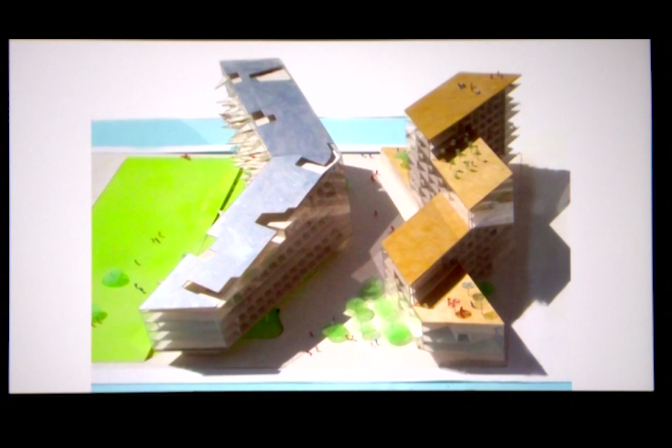This is our office in Copenhagen, an old brewery factory. Then of course we have New York, and we opened an office in London last year. We're now numbering about 460 architects between the three offices. I'd like to start with some older work, about 15 years old, to ground you in both where we come from and the kind of thinking that went into these projects.

Also note that in the first 15 years of BIG and Plot, the office prior to BIG that Bjarke and Julien had founded, there was really only one project a year completed. In the past 6 months, we've actually completed 6 projects. So the volume of work produced over those first 15, 16 years was not a lot. It was really just getting started.

I think our profession just takes so long to get things built, permitted, and financed. So there are many projects we've been working on for 5, 6, 10 years that are just starting to finish. This was a housing project called the VM Houses, completed in 2004, and it was very important to the office. It was the first real architectural project. Prior to this, there had been a bathing platform, the Copenhagen Harbor Baths, and a youth center, the Maritime Youth House. So this is 250 apartments, not a small project.

The city in Denmark has a master plan, and you're supposed to follow it. The master plan had asked for the yellow area to be a parking garage and the blue area to be a housing project. We thought, this isn't very nice — the first three to four floors would look directly into a parking garage. That's not somewhere you'd want to live.

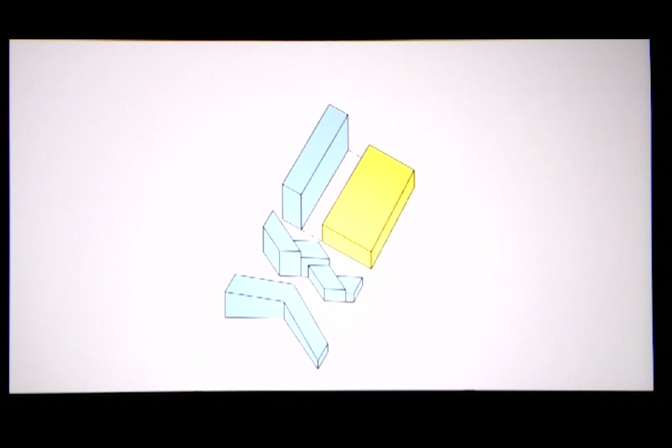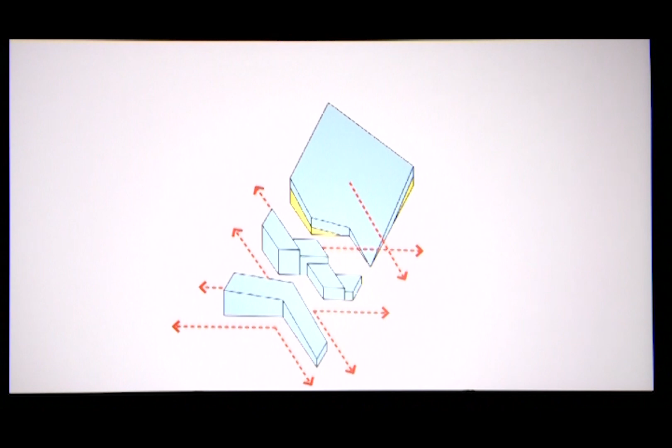So we went back to the city and asked: what if you use the parking as a base, and place the housing on top? What if you cut away exactly those views we were so insistent on in the first project? You're taking square footage away from the client in that case, but making an argument for the value it has for the adjacent projects — 80 units, all south-facing, creating a new hybrid type of building that includes 450 parking spaces.

It's called the Mountain. We decided to perforate the metal around the parking, because air has to move through a parking garage. And while we're at it, instead of perforating it with one diameter hole, we used six different diameter holes to perforate it with an image of Mount Everest. So you're in the flattest country in Europe, Denmark, but you're living on top of Mount Everest.

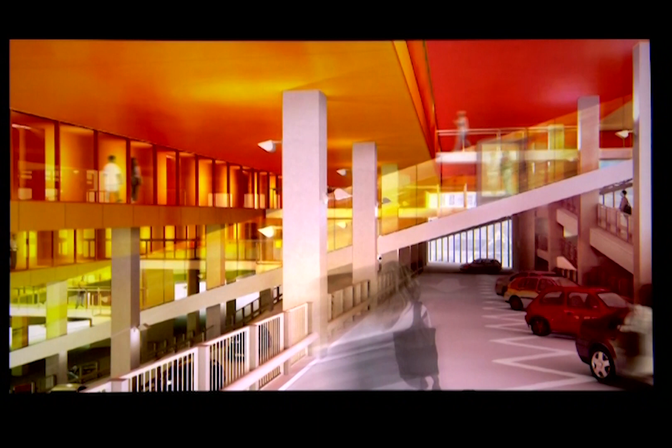The parking garage is seven levels that ramp up. We discovered that if you used traditional up-down elevators, you'd need seven of them to service 80 units — no one in their right mind would do that. So we had to come up with a new type of elevator: a funicular, a single elevator that moves up with the units, allowing you to service all 11 stories with just one elevator.

Yet there weren't any funicular elevator providers in Denmark, because it's flat. So we had to call up Switzerland and ask if they had a funicular for us. The guy said, 'Where are you calling from?' 'Denmark.' He said, 'I have to see this.' So he flew up, looked at our model and the project, and said, 'I love this project — we're going to do it, and I'll give you a good price.'

So we put in the first funicular in Denmark, and it's like a joyride — all the kids want to live there so they can take the funicular up to the units. Now the guy selling the funiculars has this project on the front page of his brochure, which says, 'We deliver funiculars everywhere in the world, including Denmark.' So sometimes you have to think outside of what you're used to or have access to in terms of materials and construction techniques, and maybe import them from other places.

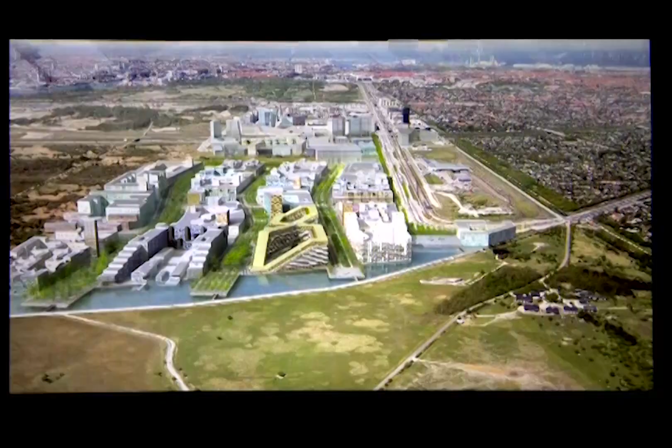I think that's a valid architectural prototype also for a place like Dallas, where you go from suburbia, and here you come into the city and it goes straight up in glass. Maybe there are actually some middle kind of projects that could bridge between the suburban projects and the high-rises and things you have downtown.

We did very well on the second project with the same client, so we got a third, which is the 8 House right here in the front. This is a new area in Copenhagen where 50,000 people will be living and 50,000 people will also be working in different parts. This is a direct reaction, or outcome, of the 60s and 70s suburbanization that was just eating up the land all over Denmark.

The construction technique in Denmark is that 90% of all construction is prefabricated concrete elements. All structure, all floors, many walls, fascia, facade material, roof, is all precast concrete, because the seasonality is so short to actually work outside on sites. So it's like Lego - you order different pieces, they get delivered to the site, and then the cranes just pop them into place.

It allows for a new way of thinking about a project. A project like the 8 House, which has no parking and 500 units - we touch the ground with ramps in 3 places, and then the units actually move up so that you can ride your bicycle up to the 10th level apartment just with the ramps. Every unit is actually going up about 18 inches from the next one.

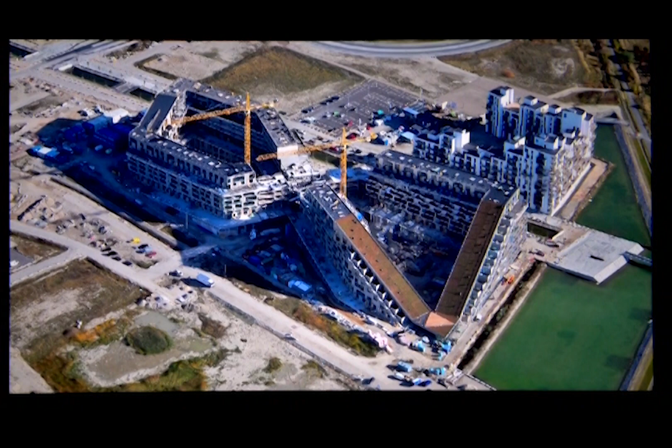It's pretty remarkable, but this was only possible because it was done in a factory. If it was a site-cast building, this would be impossible - the amount of work and all the form work. Because all the pieces were pre-ordered and put into place like Lincoln Logs, it actually became possible to do a building this complex.

500 units, 125 unit types. There are probably realtors sitting out there going, oh my God - they actually have to work. My question to the realtor world is, why do residential towers only have 4 or 6 unit types? And then I love the names - the eclectic, the modernist, the classic - like they're shoehorning all of us, this beautiful, wonderful, multi-faceted crowd, into 6 unit types. Our feeling is that life is bountiful, and thus all unit types should be bountiful.

There are families with 1 mom and 3 kids. You need many bedrooms, you need fewer bedrooms, your family changes, and so you need to create that variety in the buildings. So in this case you have shops and commercial space, row houses, flats, and penthouses. We use different types of living and working to create this ability to move up and down.

This is the southernmost point of Copenhagen, meaning the city limits end at the building, and then it's a nature preserve. So this is also where you can send your kids out and they'll actually be able to play. The other thing I really appreciate about this whole new master plan is that all of the rainwater is actually not put into canalization or into pipes.

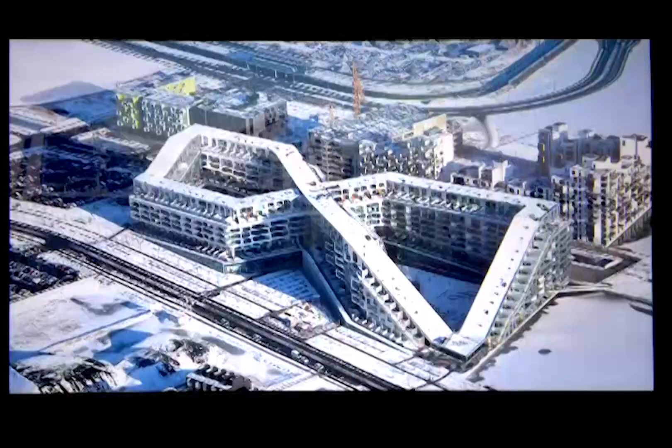So the 8 House, to me, and the whole area, is really a wonderful way of thinking about city building and making a life that we want to live in.

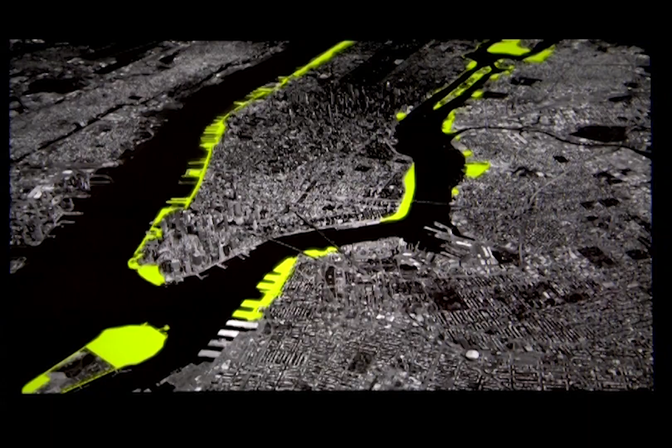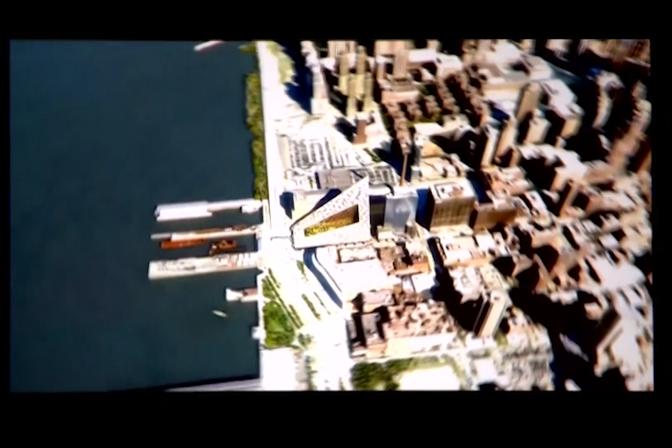So we got our first project in New York 6 years ago, called the West 57th, or VIA. It's 710 apartments, and it just finished 6 months ago. It's a direct result of this new investment along the waterfront. You see the park that just sort of skirts right by, and it's located between Hudson River and Central Park.

In many ways, the last 50 to 60 years in New York has been driven by a single typology, meaning skyscraper.

So truly, if you were building commercial space or residential somewhere in the city, you would probably put a tower on top of a podium. And the opposite is true in Copenhagen, where we're from. 90%, 95% of all buildings there are courtyards. They don't build high-rises there. It's the exception. So we were kind of fascinated, here we are, brand new, coming from Europe.

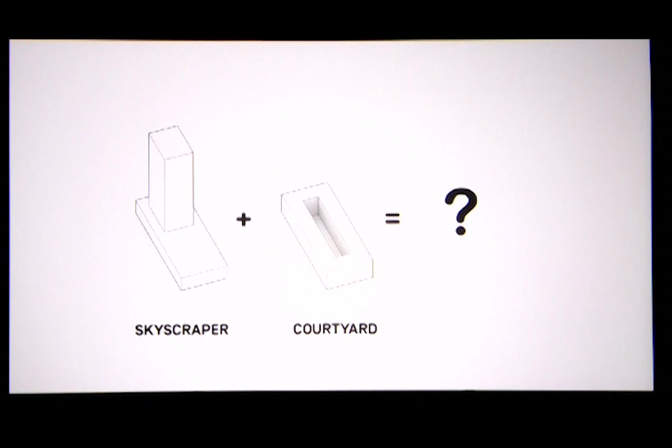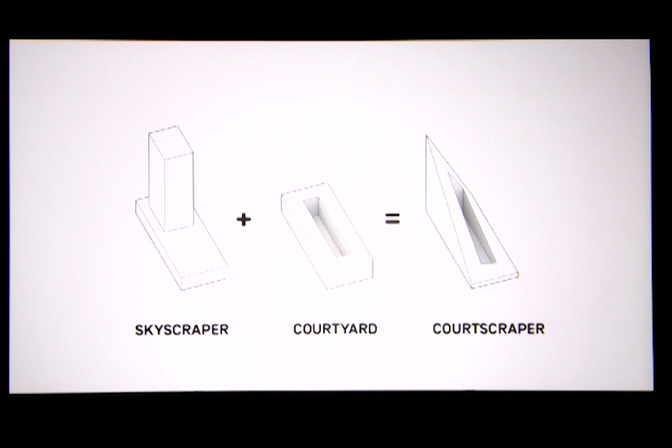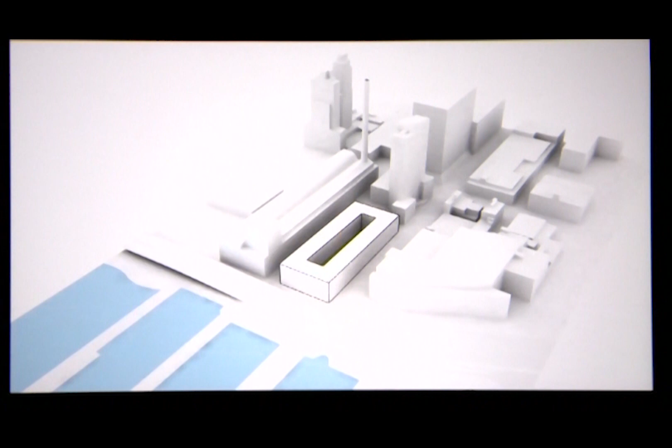What would happen if you married a skyscraper with a courtyard, and the result would be a court scraper, of course. And the court scraper was born because if you look at this site closely, the site actually is between a 1930s power plant on the left and a trash distribution center on the right. So we wanted to create the courtyard to be able to look inward.

But instead of the courtyard being on the ground level like in Europe, we raised the courtyard to the second level. Then we still had the podium that's so important in New York. We raised the northeast corner 44 floors, and we preserved the views of the building behind, so we're a good neighbor.

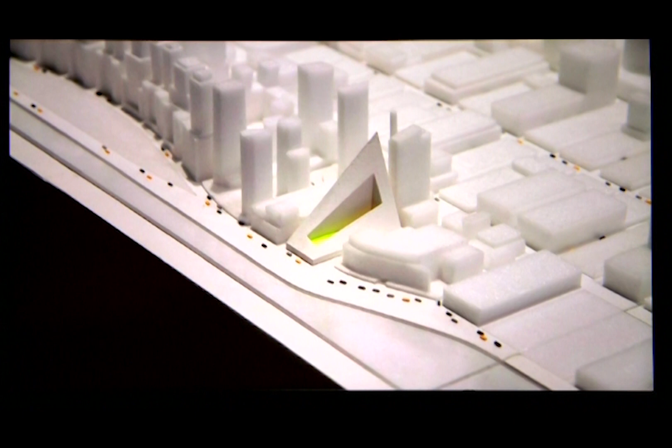The sun still is able to come into the courtyard, and thus we kind of create this new typology. The building is entirely driven and designed by all of the constraints and the challenges of that site. The city planner had nixed 2 previous designs by different architects for that site, and stated with this project that it was, in her mind, really the right thing to do on the waterfront.

Instead of building yet another tower, those towers that are lining up against the edge, that takes the views away from everything within the city, we basically allow the site to grow from the water's edge towards the back of the site.

And so this was really a chance to, after 6 years of having an office in New York, to finally have a project that was built. It was really, really satisfying.

And what Central Park is to the city in terms of its urban space, the courtyard is to this building. The courtyard is exactly 13,000 times smaller than Central Park. It also still has many of the same programmatic elements. There's a meadow, there are places to grill and hang out, there's water features for the kids to play in. So we really learned from Central Park about what it is that people really, really love.

And so when you actually move through the park, there's a lot of different vegetation, there's shortcuts, you can take the meandering path. This is a rental building. That's important to state. It's also 80-20, so 80% of the building are market rate and 20% are affordable.

And in New York, that means that a 1-bedroom is around $600 a month for the affordable units, 142 units, and that the same unit is $3,600 for the market rate. And because that's a very high price, there also are a lot of amenities that you receive when living there. There's a pool, and then you have a half-court basketball court all tucked in within the building, a poker room, and then, of course, the units themselves that look out to the central courtyard, as many do.

And so it's really a different kind of species of building that, for me, one of the funniest things was because this looked so different, for many years, no one believed, either within the real estate market or even engineers, were coming and saying, ooh, that's a really difficult building. And you're like, excuse me?

When you build a glass skyscraper, a tower, the biggest force against it is wind. And anyone who has ever had a domino in their hand and blows on it knows that dominoes fall down because of wind. The beauty of this building is actually that you have the fattest foot at the base, and you have the smallest amount of resistance at the head or at the top.

So you actually use less reinforced steel. You actually can use a thinner core wall. You actually are able to gain square footage as you move up in the building. So there are many things that I think, just because we have kind of made ourselves think that this is the only way to build, and we have created systems and construction techniques, it's very hard for people to get out of that thinking of a traditional skyscraper.

But there are other ways of designing that have other benefits. So what we're hoping to do with a building like this is to show the beauty of having daylight into all rooms.

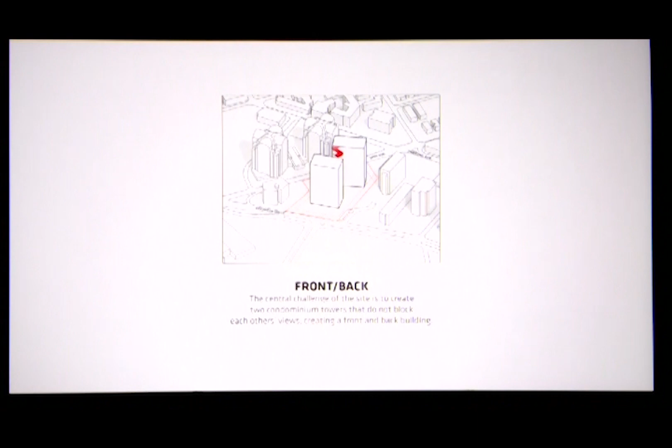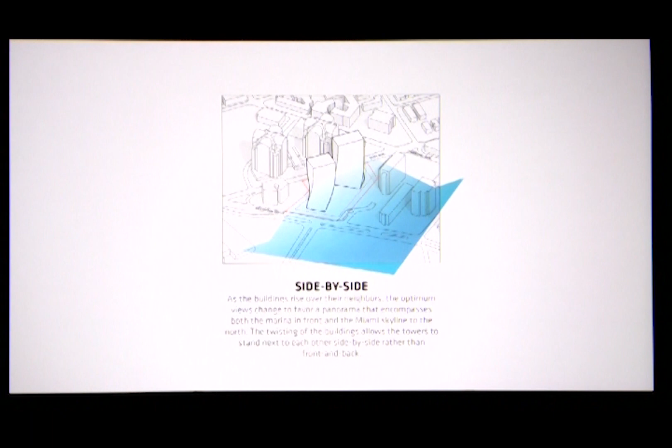So we decided to play around with that idea, and instead we decided to twist the buildings so that they appeared more side by side. Thus we were able to capture the same value in the back building as the front.

We decided we could get away with this by combining everything with a very lush landscape so that it was perceived as one project, not 2 towers. There's also one entrance, one porte cochere that you get out and enter into the 2 buildings. This perception of one entry, one landscape, and the same views allowed the client, Terra Group, to actually sell the back tower at the same prices.

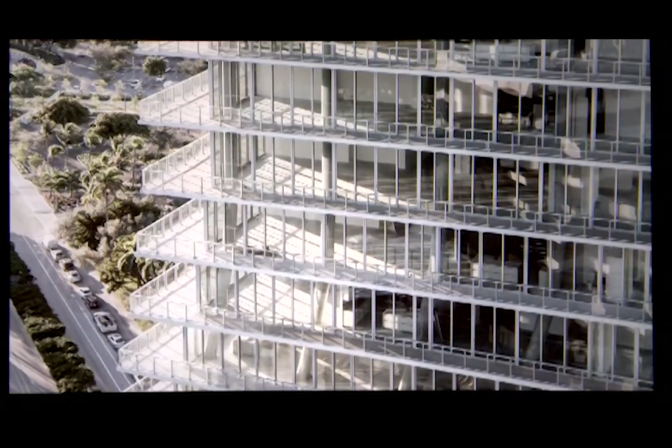We have a lot of generous amenity spaces. The inside and outside really flow from one into the other, and we have very generous floor-to-floor heights. We have the largest sliding glass doors that are hurricane-proof, and then, of course, the pool on the roof, which is a must in Miami.

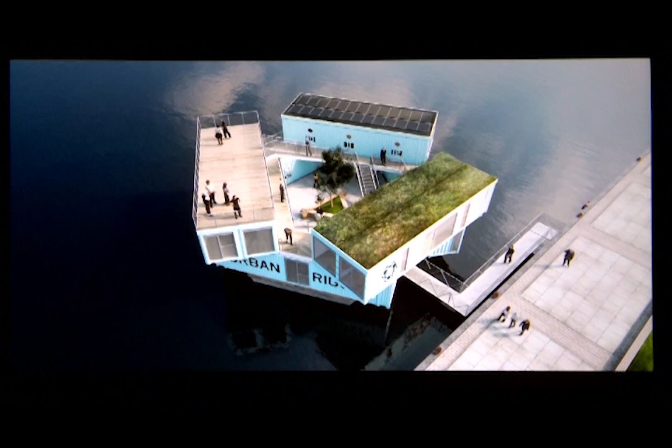So those are the kind of projects that show how we're working at a very luxury, high end of residential project. Now I want to talk about a project that we got, and I'm sure many of you can really identify with this client.

He came about 2 years ago, and there is a shortage of student housing in Copenhagen. 40,000 students live at home with their parents because there aren't enough student houses, and the other units are just too expensive to rent. So this father came to us and said, 'Please help me get my son out of my house.'

And so that was the job. What he basically said is we have to find ways to reduce the cost of student housing. And this is nothing new.

The idea we had was to recycle shipping containers. Denmark is one of the biggest shipping nations in the world. These shipping containers have a life of about 10, 15 years, and then many of them get dumped out into the ocean, either to build coral reefs or just to get rid of them when they've gone past their life expectancy. So we decided to upcycle these shipping containers into homes.

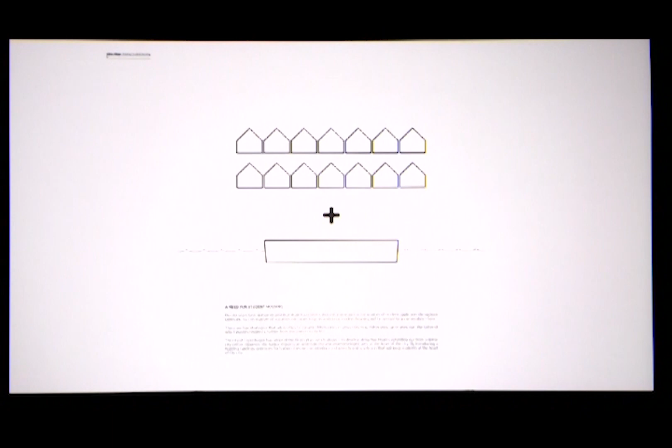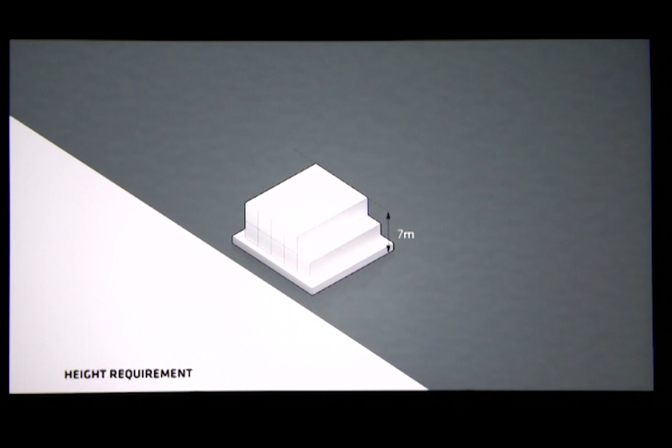The idea for us was not so much to think about the recycling of containers, because there are many projects that do that, but to actually think about the community you're about to create. So we were looking at how these different shipping containers could be positioned, placed, how they could scale, and how many floors you could stack on top.

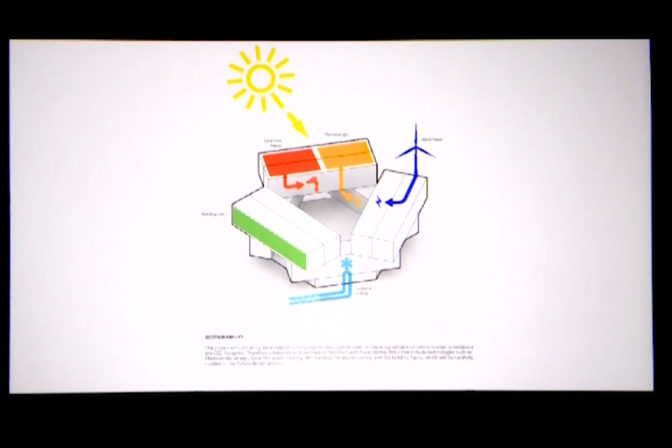We came up with this prototype of 12 beds, or 12 units. It basically has PV, or photovoltaics, to heat all the water. We deal with waste on the boat. We try to tap into different renewable energies, so it really is almost self-sustaining.

The beauty of these floating homes is that, in many European cities, you have old coastal towns that used to be industrial. They used to have shipbuilding or some industry, but that industry has left, and now they're just gray zones, brownfields you don't build on. It's interesting because those are generally in the most central parts of the city. They have all the utilities that go out to them, but no one is allowed to build on the land.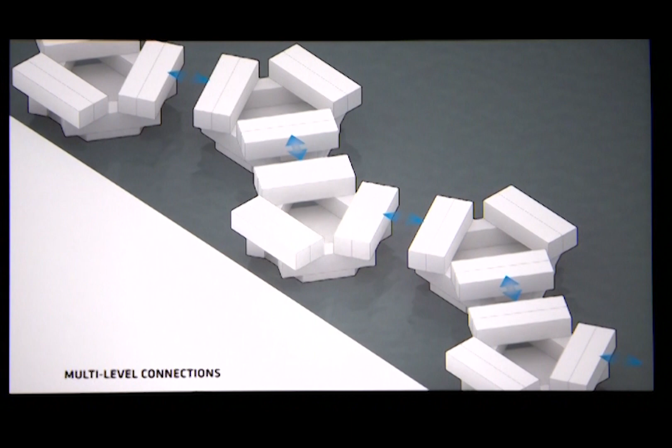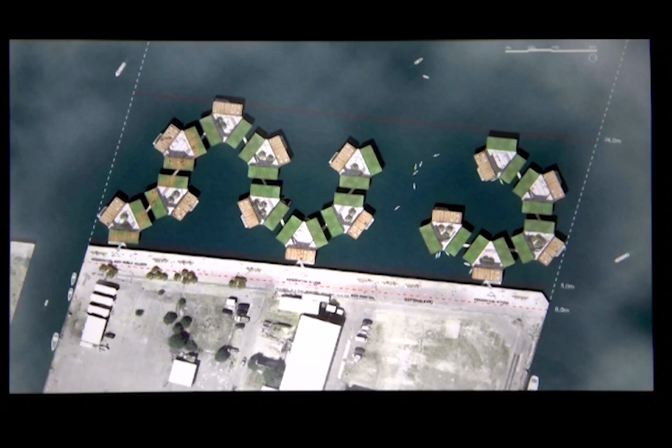So we decided, what if you created the ability to build floating villages that tap into the existing utility grid and create student villages. The other beauty is that your bedroom, in essence, has the same view as the 5-star hotel next door.

We built the prototype in Poland. It has a cement basement that actually goes under the water level, which creates the ballast. Then you take the shipping containers and arrange them. We tugged it from Poland to Copenhagen, and it's now lived in by students, including the son of the original dad—he's very proud of that. There's a little landscape element in the center, and imagine that this is your bedroom as you're going to college. Not bad, right?

We are now in discussions with two other cities, one in France and one in Sweden, to take this to a much higher and larger scalability.

The other thing that Europe has really dealt with over the last two years is the influx of war refugees, especially from Syria. Two to three million people that weren't there are there now, and the countries in Europe are breaking down, both in terms of infrastructure and where to house everyone. So these, we thought, yes, they were conceived as student homes, but they could also serve as temporary refugee homes.

These are built at one-fifth the cost of a traditional dorm room bed on college campuses, and they can be built within about one-third of the time—one-third of the time and one-fifth of the cost. So these things can be produced and done, and you're doing something good by upcycling waste that we're dumping into our oceans.

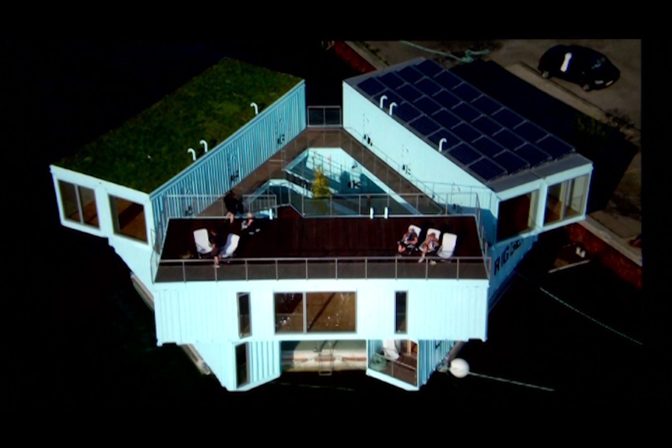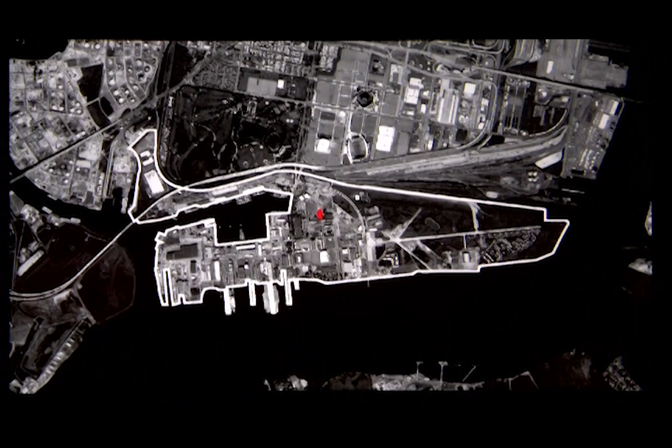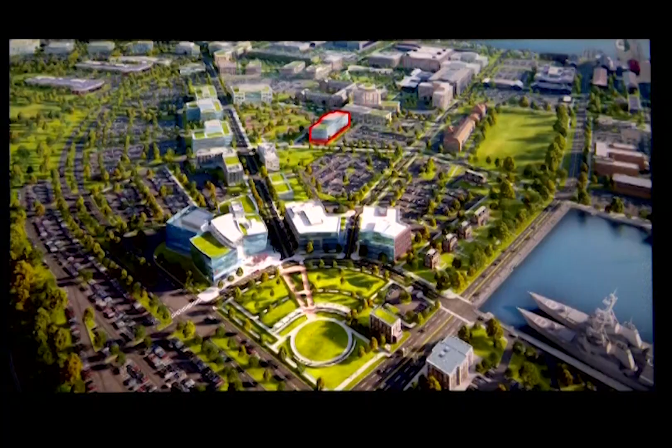Our hope is that this can really address certain critical needs in Europe, and maybe even here. We also just finished a project in Philadelphia a couple months ago—this is the old Navy Yards. The Navy Yards in the 1940s were critical to the wars going on then, and later just creating the massive Navy. Then when those ships left, the idea was to create a business park.

This is a master plan done by Robert Stern. The building in red outline is our site. Robert Stern basically just designed rectangular buildings because it's spec—this is about the lowest species of building that exists, right? It's an office spec building with no tenant, being built on the periphery of downtown.

They were going to make one investment, the developer, which was to build a park in the center of all of this, by field operations, James Corner—I saw he was here speaking a few years ago. James Corner had this idea of circles; he went crazy with circles on this site.

But then it was strange because all the streets they were building new were back to rectilinear, straight lines. So we asked the client, since they were still making the streets, why not actually curve the streets, so that you're saying the park is more of a priority than the actual building. The building is, in a way, reacting with the park.

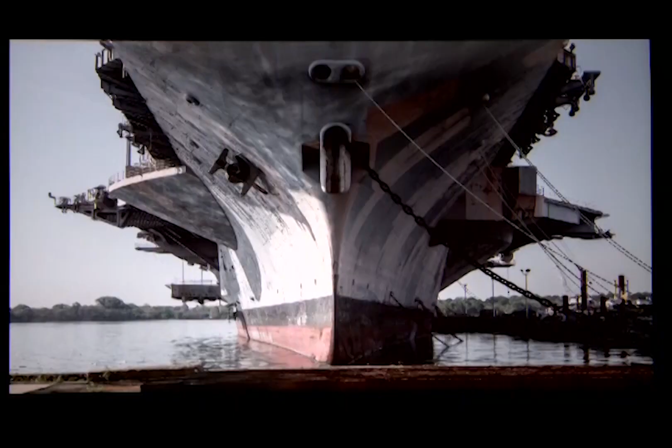So we would maintain Robert Stern's master plan on the roof—it would be that rectangle. But at the base, it would react to James Corner's park. That would create, in essence, a building also influenced by its surroundings, the mothballed ships. And so we basically created a spec office building for about $290 a square foot using precast elements for the facade.

The precaster was hilarious, because all they had ever done was precast T's and double T's for parking garages. Then we went there and said, we'd like to put your precast on the facade. They were like, what?

And they were so proud of this that they brought the entire crew from northern Pennsylvania and had a barbecue when the building was finished. So when you actually look at the scale of those panels, they're pretty serious panels.

In the center of the building, when you look at our site, it's about 2 blocks away from the waterfront. It's called the Navy Yard, but you really don't see the Navy ships - you don't really know that you're in a Navy Yard when you're in the middle of this site. So we decided to make a little periscope in the lobby so that you look up 4 stories, there's a mirror, and it mirrors the very same mothballed Navy ships and brings them down to you. Also, in the spec office building, notice that every floor's puncture becomes smaller because as you move up in the floors, you're paying more rent.

So we're turning from the orientation that we had given to us by Robert Stern, but then the ships are in a different angle, so every floor goes to the ship angle and then becomes smaller as you move up. Just a note that you can bring that kind of thinking to any budget - it really doesn't have to have those budgets that you saw in the first couple of projects.

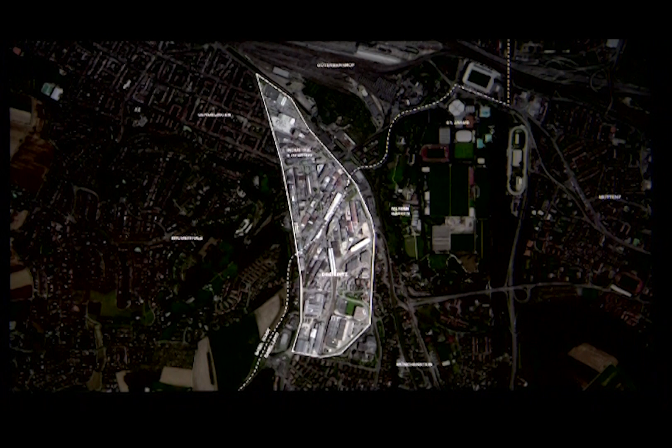The fifth project that we just finished is located in Basel, Switzerland. And for any of you guys that know Basel, it's the home of Herzog de Meuron, so this is like going into the enemy's territory - we gotta really do well here. Except that in Basel, our site is that white outline at the bottom, and that's the armpit of Basel. So the armpit of Basel is where they dump all the buildings that they don't like in the center of the city - it's basically all the warehouses, and all of the kind of gunk.

And they have now built up everything around the city that they now actually realize that this armpit is actually kind of nice, it's kind of close to the city. So we're going to go in and refurbish and reuse these buildings. We were given this building, Transitlager, a 1970s warehouse, cast in concrete. It is so solid, it is so immaculate, it is so Swiss - it's not going anywhere.

And they said, okay, make this into residences. This is UBS Bank that hired us, and we were like, okay. So we were trying to figure out - it's very deep - how do we actually bring daylight into it. And of course you could cut a courtyard into it, but we decided to actually add some floors to the top.

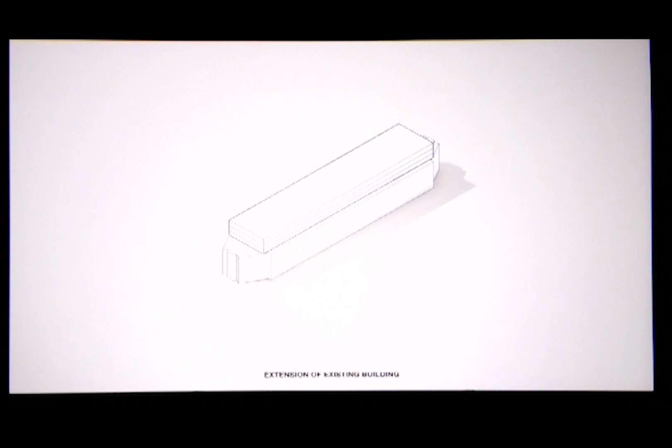Make a little lightning bolt so that you have these triangular landscape pieces. So we stack the 3 floors, we have the cores, we twist the floors so that they actually allow for that landscape. Everything is rational, everything is on a column grid.

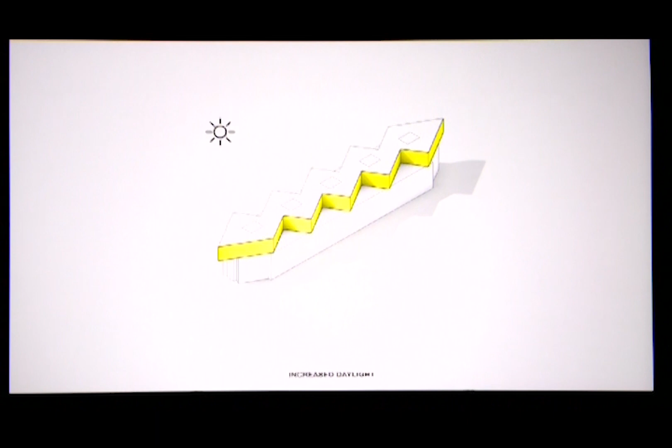And then we assemble this building into - right now, as you can tell, we cut larger windows into the base building from those little tiny ones. And it's fully rented. So for the bank, this was a pretty massive success, because how do you get people to basically move into a warehouse district? It also, I think, shows that BIG doesn't just do new construction - we also work with existing buildings in many of our projects and adapt and breathe new life into them.

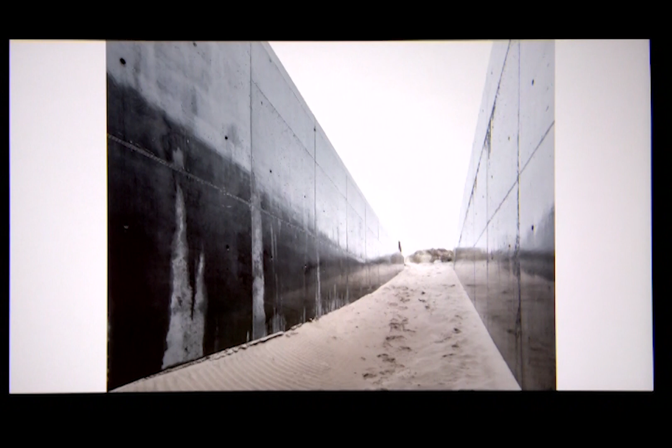What we've decided to do is basically incise or cut into one of these dunes, because it's a beautiful dune landscape that you have from the sea. Then basically you walk from the dunes into this museum - you enter into the German bunker, which we just leave as this raw space, into then 4 rooms of this new museum. We try not to have any doors.

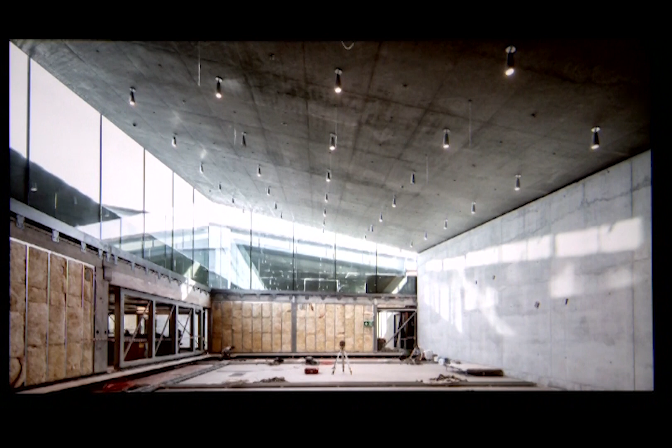We have these cracks and lean-tos where you're able to move from one room into the other. Everything is super minimal in terms of the different materials. And take a look, that's a cantilever, so there are no columns in these 4 rooms. This is literally carried by the wall and tied back into the dune.

Up above, when you're standing in the courtyard, you can see down into these clerestories, so you can look down into each of those 4 rooms as you're walking through the dunes. So those are the kind of 6 projects that we are completing and have completed just in the last 6 months.

We have about 8 more projects that are all completing by the end of 2017. So this is for us - we're about to produce the same amount of work this last 18 months as we did in the first 15 years of being architects. It's a really amazing time for us.

Now I'm going to end by showing you a couple of new projects that you may or may not have heard about. We have a site in Hudson Yards in New York, right adjacent to the High Line. It's for Tishman Speyer, who owns Rockefeller Center.

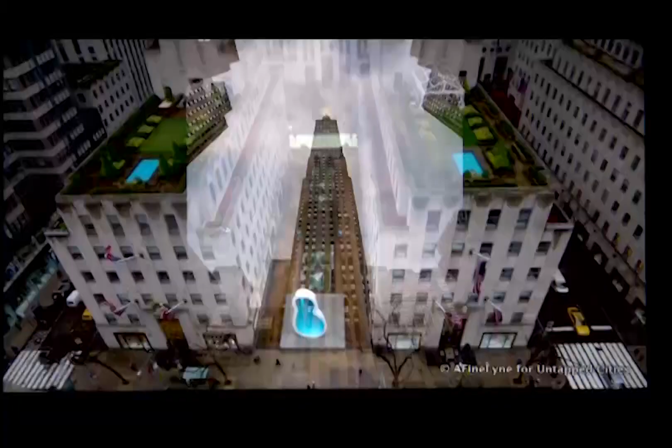You know Rockefeller Center from 30 Rock and from all the TV shows, but what you probably don't know is that it's an incredible office building built in the 1930s, where every inch of its roofscape is terraces. These terraces go all the way up to the top of the rock, which in my mind is one of the most beautiful observation towers anywhere in the world.

I think it's a really amazing thing that happened in the 30s, where they wanted to create spaces and places for people. Then I think we kind of lost a little bit of that, and it became super commercialized, and you don't find the same generosity.

If you think about Rockefeller Center, it has the ice rink. It has beautiful places where public art is displayed. It has gorgeous retail floors that are 3 to 4 levels. It has the roof terraces where you have weddings and family events. You have the top of the rock.

We really should ask when towers are built in our cities that they really reintroduce these kinds of public amenities, because we're losing out when everything is just privatized.

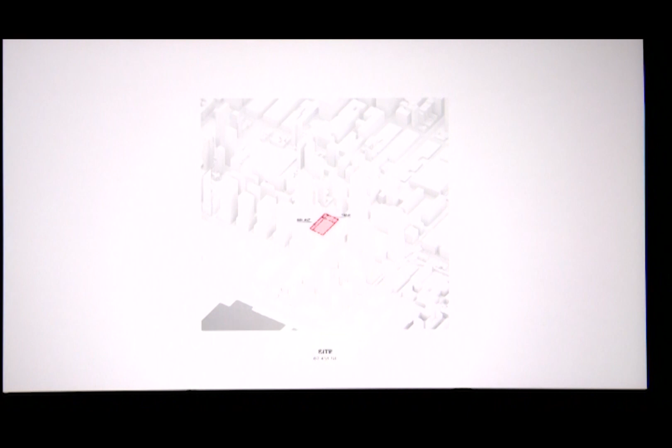Our site is adjacent to Hudson Yards, which is, I think, New York's largest construction site. This is what a zoning envelope would look like - you have setbacks for different heights. And there's the High Line, which ends right at the building. So what we decided to do - why not take the High Line into the skyline?

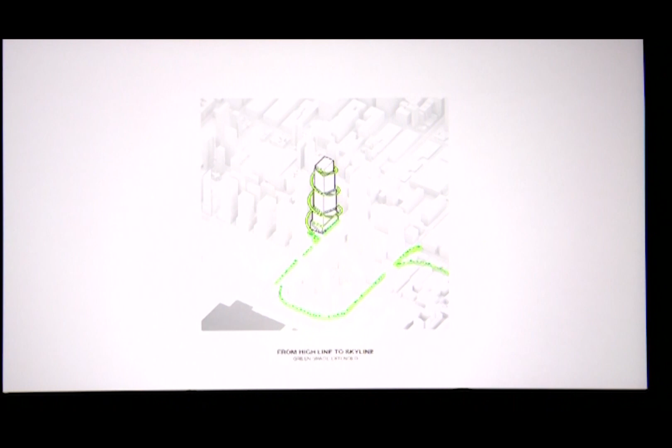So we cascade gardens and spiral them up to an observation tower at the very, very top. This was a way to actually extend it. Everyone loves the High Line - it's about 1.5 miles long, so why not add to that?

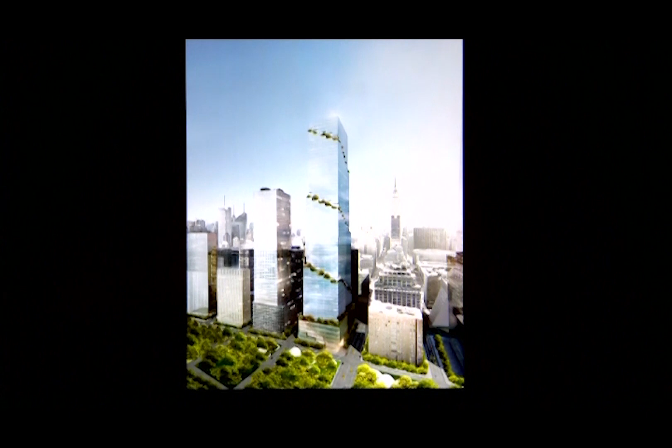The beauty of the High Line is just how many different social spaces there are and what you can do. Now imagine if you were working and had the ability to pop out and have the same experience on different levels of the building. Our hope is that this is a new species of high-rise, bringing back some of those ideas from the 1930s into the way we actually use our buildings.

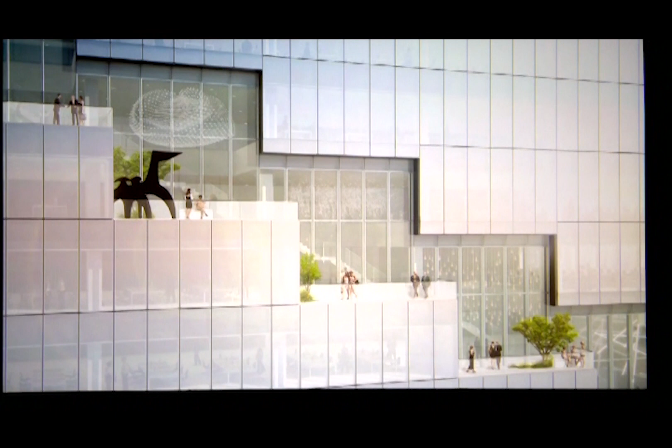So this is a typical building, and the idea you now have to do is convince someone that the 2-story spaces are important for their office culture. We do feel that we're finding there are different types of companies.

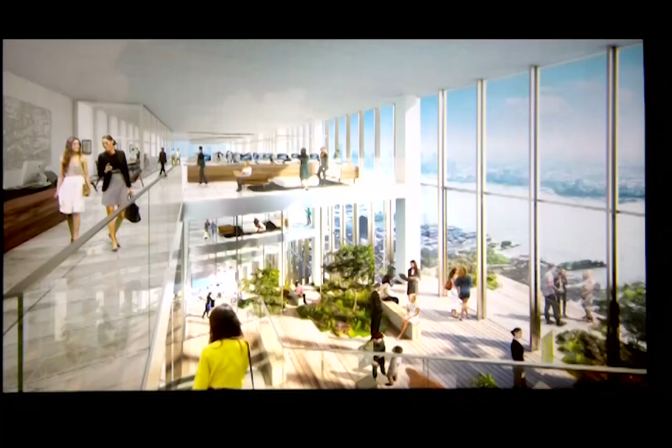We're working on the Google headquarters and with a lot of different media companies. We're finding that those companies, or the WeWorks of the world, are placing tremendous value on communal spaces - spaces where you see each other, where you create connections of people walking into each other by chance. That's a very innovative and creative space.

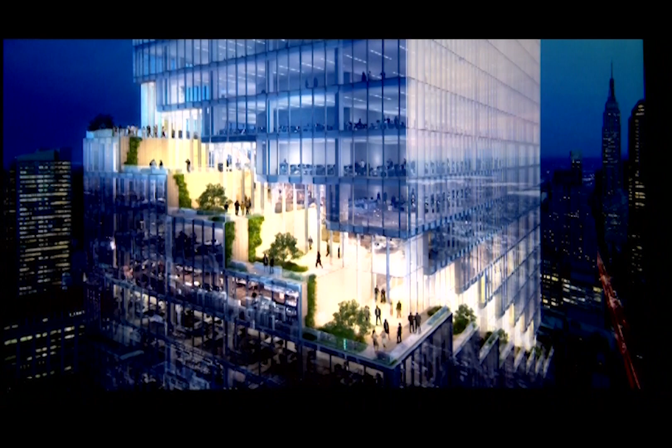Our hope is that we're just completing schematic design on this project, and are hoping it will soon go into construction. I'm going to let Bjarke tell you about a project that we're doing in Vancouver.

The Flatiron in downtown Manhattan is an architecture born out of a specific moment in New York real estate history, where skyrocketing land value intersected with the advent of steel structure and elevators, transforming a difficult triangular site into one of the most striking landmarks in New York, becoming the namesake for its entire neighborhood.

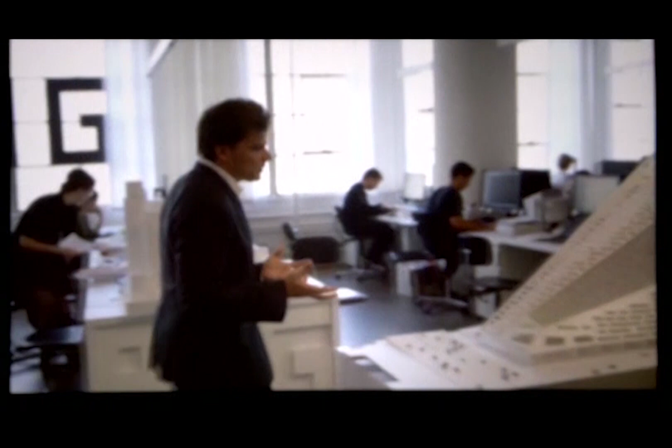And for us at BIG, this is a perfect example of how we like to work. We like our designs to respond to their surroundings. We like them to inherit their attributes from the challenges and potentials of their environments.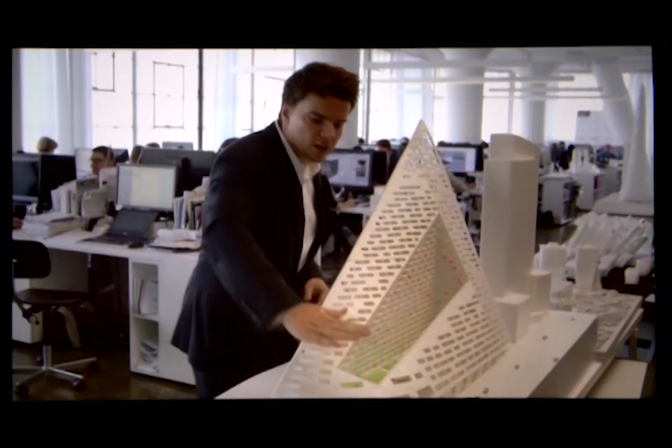Like, for instance, this court scraper in Manhattan that combines a courtyard with the density of a skyscraper, creating a warped pyramid on the waterfront of the city.

So essentially our buildings end up looking different purely because they perform differently. Take for instance this financial center in Tianjin that inherits its stalagmite silhouette from the structural challenges of building taller than 0.5 kilometer. Or this observation tower in Phoenix that allows visitors to experience a three-dimensional 360-degree panorama of the surrounding city, almost like a heavenly body hovering above the desert.

And finally, that brings us to Vancouver. The first time I arrived in Vancouver, I drove across the Granville Bridge, and I was struck by the beauty of the urban panorama of the slender glass towers rising against a backdrop of the sea and the mountains. And right here where Granville Bridge triforks, we've been invited to reimagine the gateway to the city.

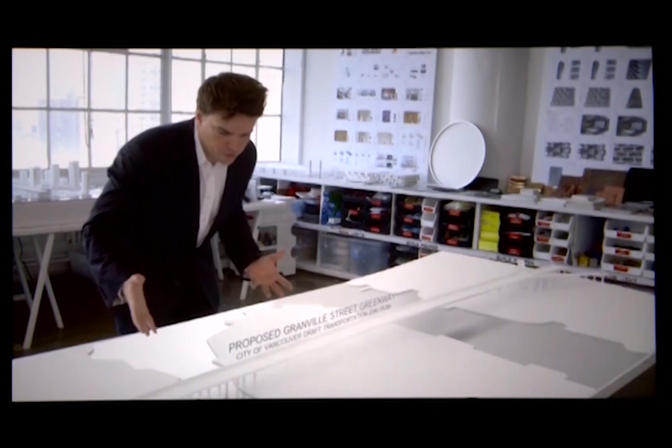This is already a site in transformation. Granville Bridge is being transformed into a pedestrian parkway, almost like a Canadian cousin to the High Line in New York. And right where this new green promenade touches downtown, it's going to create a new urban oasis, which is going to become our new neighborhood.

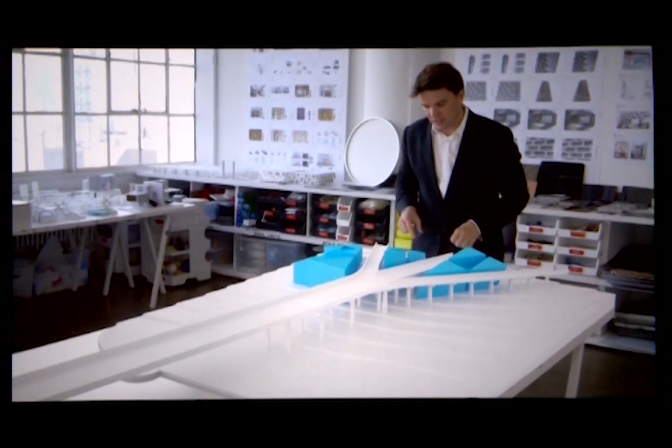So first of all, we thought, why don't we reimagine the traditional urban podium and turn it into a lively village full of alleyways and plazas, a dense, lively urban environment of restaurants and retail underneath a green carpet of grassy roofs and under the canopy of the bridges.

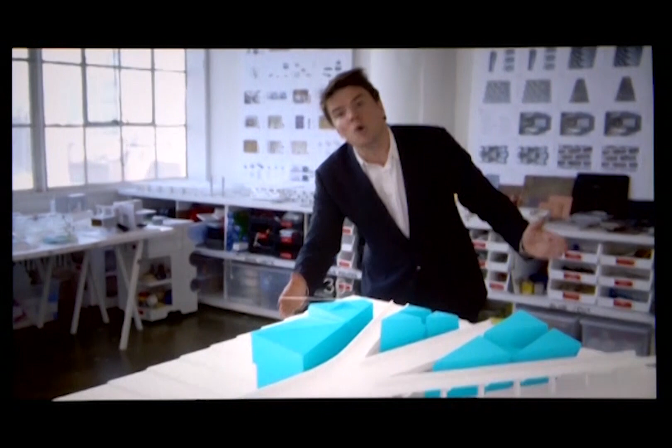And for the tower, there's a general 30-meter setback requirement from all the bridges to ensure that nobody lives too close to the bridge, reducing our tower to this tall, slender triangle. But also to respect the neighboring park, we had to recede our silhouette to ensure they get daylight and sunshine, reducing our footprint to only 600 square meters.

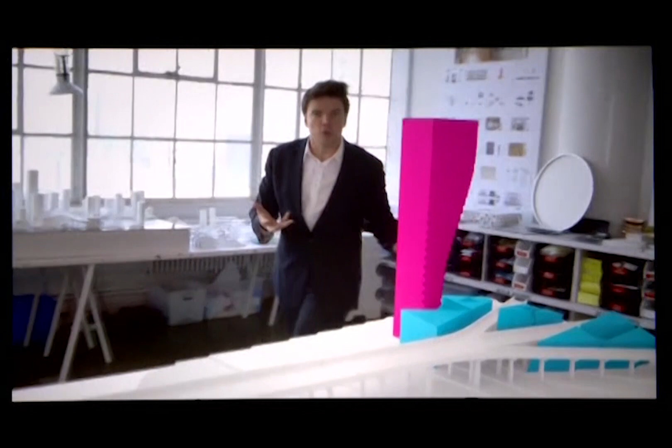But then we were thinking, if the 30-meter setback has to do with ensuring a minimum distance, as soon as we rise above and beyond the bridges, we can actually come back out and maximize the areas with the greatest views and the most abundant sunlight. So it almost becomes like this tower turned upside down that actually grows out of a tight spot in a lively city and then expands to occupy the maximum area in the surrounding skyline.

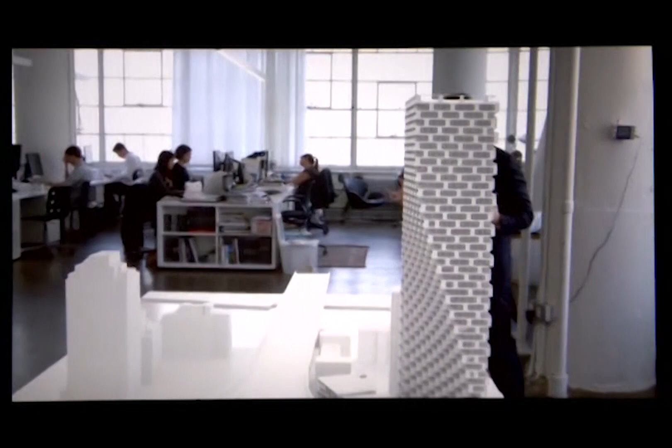In a way, you can see Vancouver House as a contemporary Canadian evolution of the Flatiron that takes the residential high-rise one step further into the future.

So you just saw in a nutshell basically how, again, a project is driven by all of the challenges of those sites that we work within.

And again, there's of course a cost for making those cantilevers, but when you actually do the math, there's a 20% upcharge on the structure that you're spending, but you've actually increased the unit count by 50% in the upper levels. So you've created so much value right where you want it, and that makes everything sort of pencil out.

The beauty of actually thinking about these things is when you consider that triangular parks or triangular sites occurred when Broadway cuts across the grid in New York. I just learned this recently, and I hope I'm giving some of you an aha moment. Do you know why Broadway is a diagonal across the city grid?

Anybody? It's the ridge. It is the actual ridge of Manhattan Island, and the water sheds either to the East River or to the Hudson. And when you realize that, that is pretty profound.

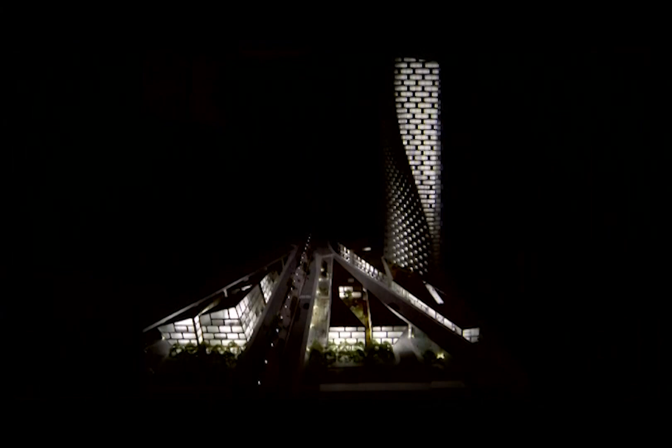So instead of the Flatiron, we created the Fat Iron in Vancouver. And it's under construction and is going to top out at the end of this year.